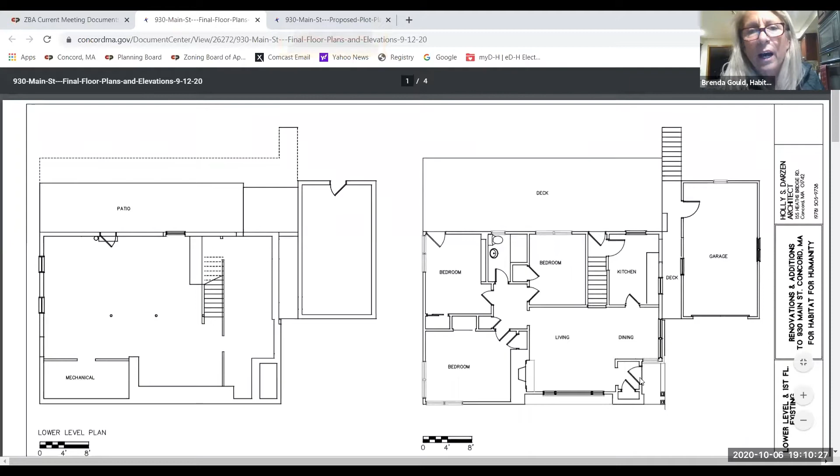As I mentioned, we want to leave the house as much intact as possible. Really the main floor is going to stay pretty much the way it looks right now. The upper level will pretty much stay in that format with the kitchen to the right, the 3 bedrooms, and a big living area in the front. We are going to upgrade some of the exterior—siding, roofing, trim—so it won't look exactly alike, but it will still keep the essence of the original building.

The lower unit, we are proposing a walkout level of the existing building. It will be accessed by construction of a new entry and stairway. The garage structure will be extended a little bit more toward the street, but it will have the same roof line as the existing, and it will provide space for the front door and a small covered porch. So keeping the existing roof lines means that pretty much the appearance of the home will really not change, and that was something we wanted to do. It also provides some measure of privacy for the 2 families.

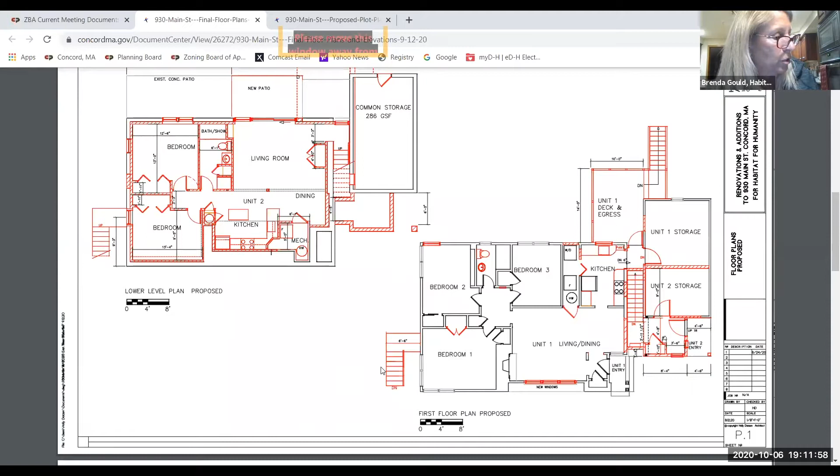The only other change is the stairway down to the lower unit. It will be where the current gap is between the house and the garage—that's where the stairway will be. The 2 homes will be separated by the fire-rated construction necessary, and each home will have a second means of egress. The upper unit will be through the new deck we're going to put on—there's a big deck there now, we're going to put a smaller deck, and stairs down to the backyard. The lower level will have the sliding glass door in the living room area, onto the patio, and then egress through the stairway down. Each of the bedrooms will have the windows necessary to meet emergency escape requirements.

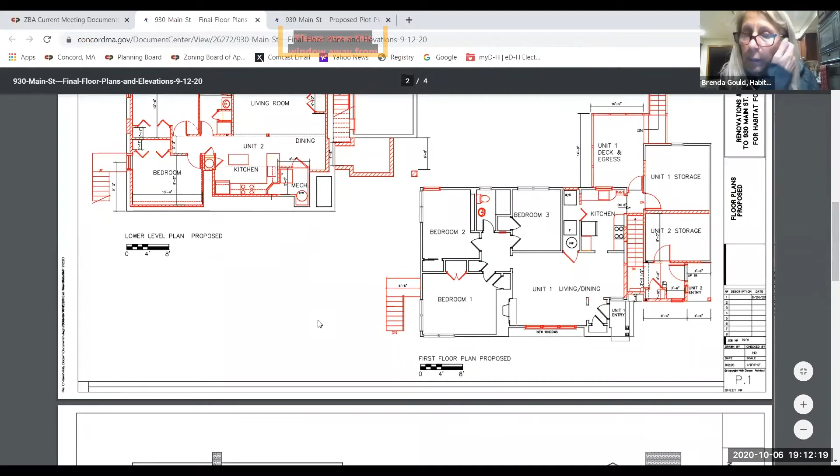So the major change is the garage, putting that into a storage unit. One thing that Habitat has learned is in order to be a good neighbor, you have to have a place to put things.

There's going to be bikes and there's going to be stuff, and we want to make sure that it's not out in the front yard or in the driveway. And so a storage unit, we feel, is very necessary. At a later date, should we look at the proposed site plan and see if a shed can be put in, that's a later date. But right now, the storage unit is kind of key.

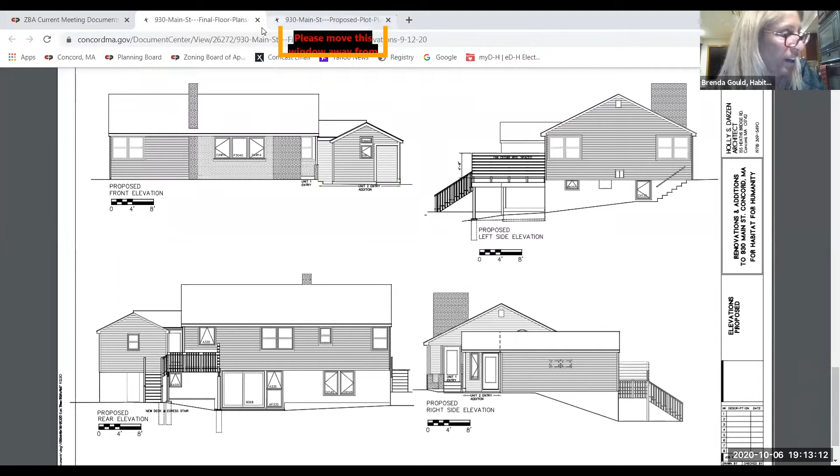I think in general that is the main bulk of what I'm asking. And Elizabeth, I thank you for putting together this letter. It covers everything and has given me an area to really make sure that we're abiding by the rules in Concord. We haven't built in Concord since 2007, and it's a little bit different from the towns I've been dealing with. Had Jeff not made me aware of your tree bylaws, I may have accidentally gone and cut down some trees, but we want to make sure we get off on the right foot and do this all correctly. So Elizabeth has laid out what I need to do, and we will do it.

So the issue, this is what we have. The main concern right now is that small piece of the garage that's over on the state land. I have Stan here should you have any questions. We really prefer not to remove that. It's costly and would really slow us down. But other than that, everything is pretty much staying the same.

It currently has a cesspool, and so we are working with one of the authorized drain layers from Concord, Bill Eckelsheimer, to put in sewer lines and water lines, singular. And we will do our very best not to disturb too much vegetation. We have our rules on that. That's kind of it in a nutshell.

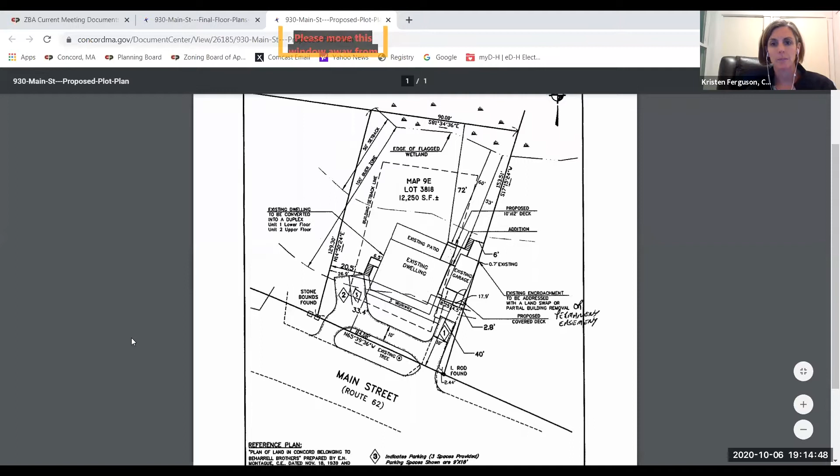I've got a quick question. So these will be condominiums, is that correct? Yes, we'll put in place a condo association. Okay, and you said it will be just single water, single sewer hookup, so those won't be separated?

If I read the water and sewer information correctly, originally we were going to make it separate. My preference would be to make it separate, but based on their guidelines, they're asking for a singular hookup. We have to figure out a way whether we can put two meters on one line or do some kind of deduct meter, because we don't want the families to have to worry about who's using what water. Right, that's why I asked the question. Yeah, we have done that before.

So Burton, what I can tell you is there's going to be two options, and they will easily be able to work through either option with the water and sewer division. It comes to either they would provide their floor plans and plumbing plans to show that there is complete separation between the two units, to be able to somehow have two water hookups. If not, there would be one water hookup, and then once on the property, they can be separately metered. Oh, okay, so it'll just be how they work through that with water and sewer division. Okay, great.

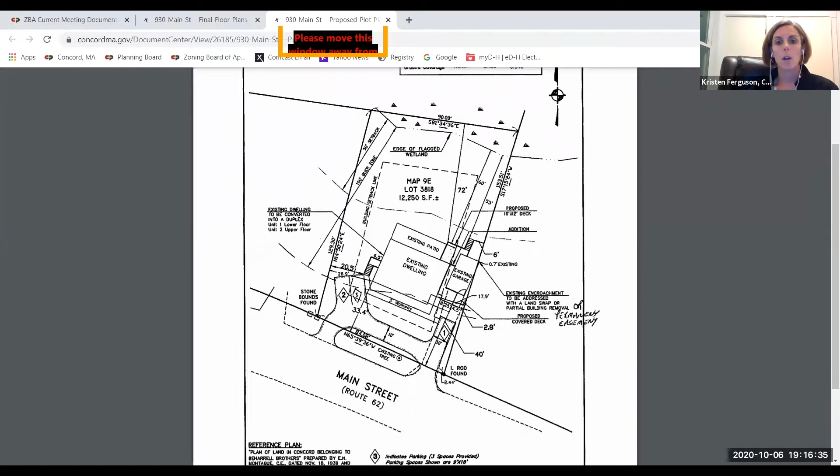That's my only question, Kristen. Question about Ms. Gould mentioning the corner of the garage on state property there. Is that anything that we need to take into account for the parts that we're evaluating?

So that's why we were happy to have Stan from the state available for this meeting. He can go through and talk about the state being willing to provide a permanent easement for that. Stan, if you want to go ahead and explain that, that would be great.

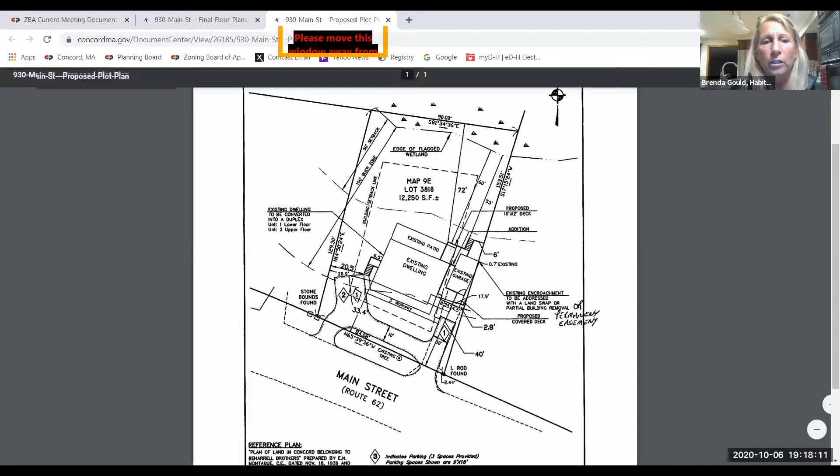What was your timeline again for the project? John's or mine? What are you total anticipating for the project start and finish date?

I was naively thinking we would be able to start before the end of the year. Originally I was hoping we could start in September, which is long past, and be done in a year. Normally, a year.

Because we build with volunteers, all volunteers, and I know you're sick of hearing about the COVID problem, but we have to be very careful with what we have on for volunteers. We're only accepting about 8 people, if people even come out. John's done a really good job making sure safety measures are on site.

So right now we're building in Billerica, and due to the reduced number of volunteers, normally we have 2 houses going at once, but we'll probably hold off and start this one sometime in preferably January or February, then be done before the end of the year.

Wow, that's a challenge. Yeah, well we're hoping the house is in pretty good shape, so we don't have to start from scratch. But as many of you know, once you start opening up walls, sometimes rehabs are harder than starting from the bottom up. So we're pretty excited about this.

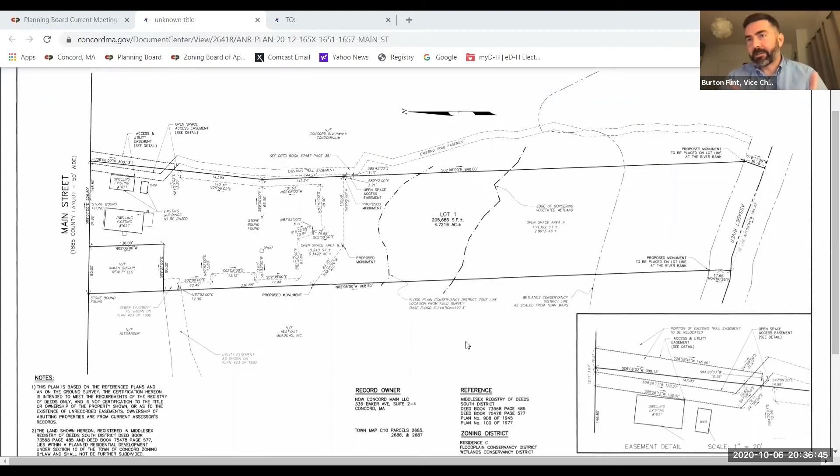Elizabeth, I will abstain from this just because I'm a direct abutter. It seems silly to do it on an ANR, but would you agree that makes sense? It's fine. All right, thanks. Are there any questions or discussion about the ANR, what Elizabeth's showing?

Okay, then I would entertain a motion. So everybody have their memo in front of them. If not, I'll do it. I can do it.

There it is, the planning board should move to endorse the plan. I move that the planning board endorse the plan for Now Concord Main LLC dated September 23rd, 2020 as approval not required, because the plan is not a subdivision, because the combined lot has at least 80 feet of frontage on an adequate public way, and authorize the chair, clerk, or town planner to endorse the plan.

Is there a second? Second. Is that Nathan? Yes. Thank you. Ms. Miller? Yes. Ms. Orvidal? Yes. Mr. Saya? Yes. Ms. McEnany? Yes. Ms. Ferguson, yes. And Mr. Flint is abstaining.

Yep, okay. And then do we have one more A&R? Okay, yes. So give me 2 seconds, and give me one more second. So I'm going to promote the...

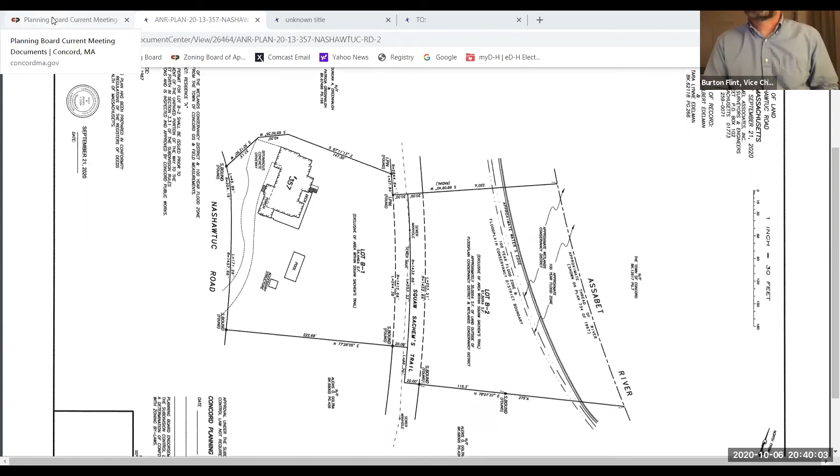And if the board needs to, I can bring up the town's web GIS and show you exactly where that is, if that's helpful. It'll just take me a minute. Would that be helpful? Yes, yes, it would be helpful. Thank you. Okay.

Okay, so this is Main Street down here. Then it goes off to Elm Street over here. This is Nashawtuc Road coming off of Main Street, Nashawtuc Road wrapping all the way around. This is the lot under discussion tonight. Off of Nashawtuc Road is Squaw Sachem Trail.

Squaw Sachem Trail is an old right-of-way from this initial subdivision. It is a private way, it is not public. It has been improved all the way down to 80 Squaw Sachem Trail.

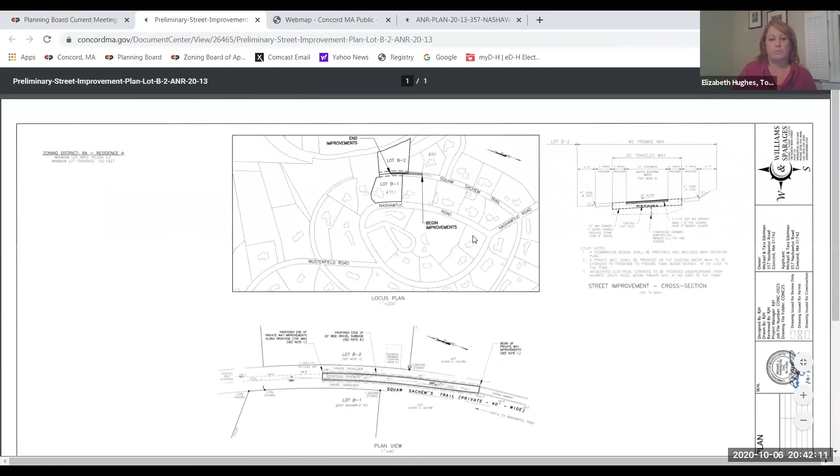So what the applicant is proposing to do, they have provided an A&R plan as well as a street improvement plan. And the street improvement plan shows improvement of Squaw Sachem Trail, from the current end at 80 Squaw Sachem, and how the road would be improved to an adequate pavement, grade, drainage for 150 feet, which is the required frontage in the Residence A zone district.

So that they can provide the sufficient frontage and area to create this new A&R lot divided off from this lot, there is a condition, a note on the plan. It states that no building permit for lot B2 shall be issued prior to the improvement of the unpaved portion of the way, to the standards set forth in section 3.3.1 of the subdivision rules and regs, and is inspected and approved by the Concord Public Works.

So what the applicant is asking for is for the board to conditionally endorse this A&R plan, that this lot will have sufficient frontage on an adequate public way, conditioned upon that street improvement plan and those improvements being constructed prior to a building permit being issued.

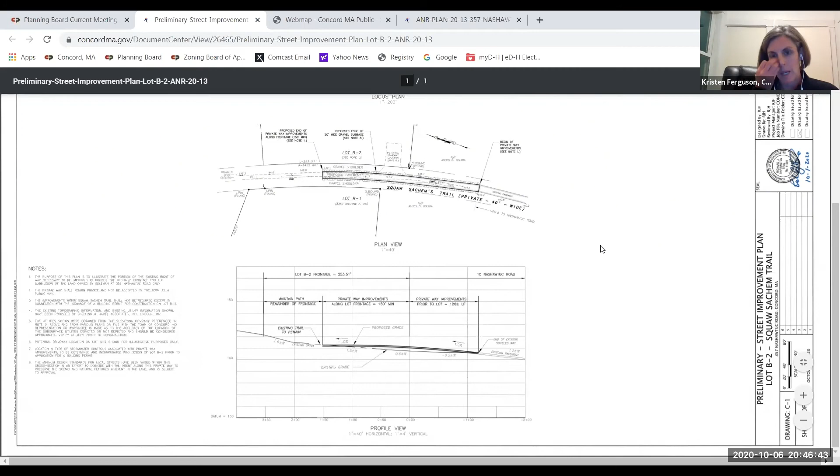And Linda, my apologies, approval not required, and I know you are getting yourself up to speed. When these come before the board, there are just a couple of factors we are able to take into account after we've asked any questions to make sure we understand. I believe they are: that if it's not a subdivision, it has the proper frontage on the way, and it has an adequate square footage. And if it has those two things, the approval is not required, and I think we approve it.

So what I can explain further, for Linda's benefit, since she has not gotten her packet of stuff that you all get when you become a planning board member, which includes your zoning bylaw and subdivision regs. We have other handouts regarding subdivision control law and approval not required plans. Under the subdivision control law, the state specifically states that the division of a tract of land into 2 or more lots, including re-subdivision, shall not be deemed to constitute a subdivision if at the time it is made, every lot within the tract has frontage on a public way, a way which the town clerk certifies as maintained and used as a public way, a way shown on a plan previously approved and endorsed in accordance with subdivision control law, or a way in existence as of February 28th, 1938, meeting the standards of the board as set forth in section 3.3.

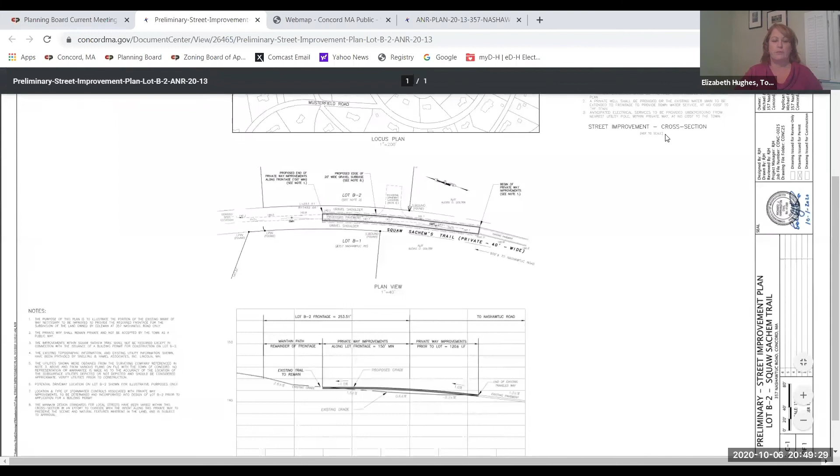Is the traveled way constructed at least 18 feet wide with at least 8 inches of depth gravel, and were adequate provisions made for drainage? That's what this plan shows. It shows the cross section, the depth of gravel, and the width of the pavement. And if the road could ever service more than 5 dwellings, is it bituminous surface or have provisions been made for surfacing without cost to the town? This is showing that it would be a paved roadway.

Have provisions been made for public utilities without cost to the town? There are public utilities running through this section, and I believe there's an actual town sewer main that runs through here. And yes, so 3.3.1.

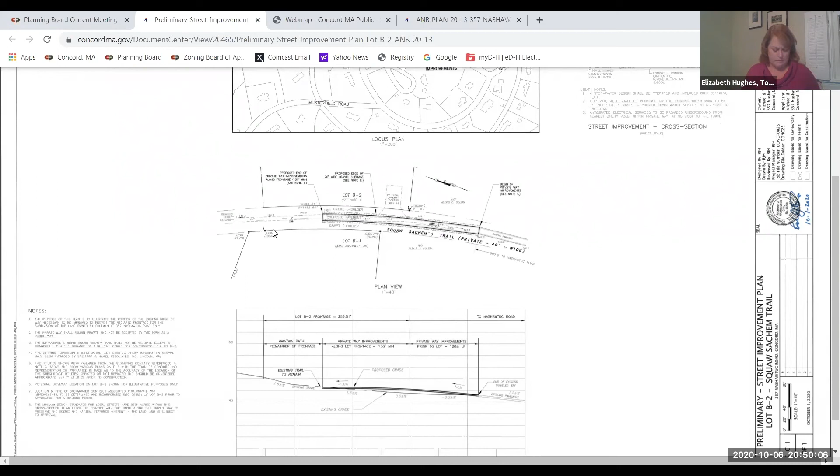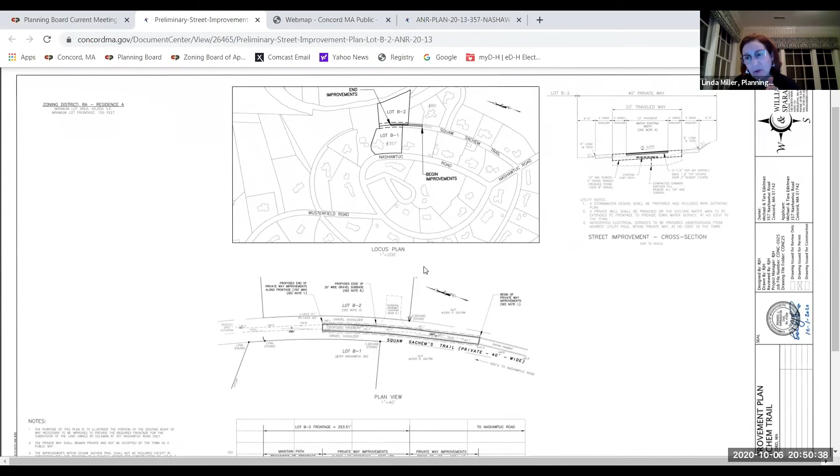I have some questions, and maybe they're irrelevant or maybe they're not. Squaw Sachem up until this point is becoming parallel to the Reformatory Trail off of the Assabet River, and when it gets to this point, it's getting quite a bit closer to the river. So in terms of that distance to the river, there are a couple questions. Would there be any adverse effects of this road being placed closer to the Assabet?

And then the question is, in terms of the current use of the Reformatory Trail, you can walk all the way from Squaw Sachem to the Concord Land Conservation Trust areas on the other side. And would this use of the land interfere with the river confluence trails that are over there? Or are those things irrelevant?

Well, they're not irrelevant, but they're not relevant to the discussion of an approval not required plan. So an approval not required plan is only looking at whether there's adequate frontage for the creation of that new lot.

Can we assume, Elizabeth, looking at that plot, or at this web map you've got up, that the reformatory rail bed has been extinguished by several lots in a row, in terms of a right of way, at what is now going to be this lot B2? Is that what I'm seeing here? I see that, correct. Yeah. Okay.

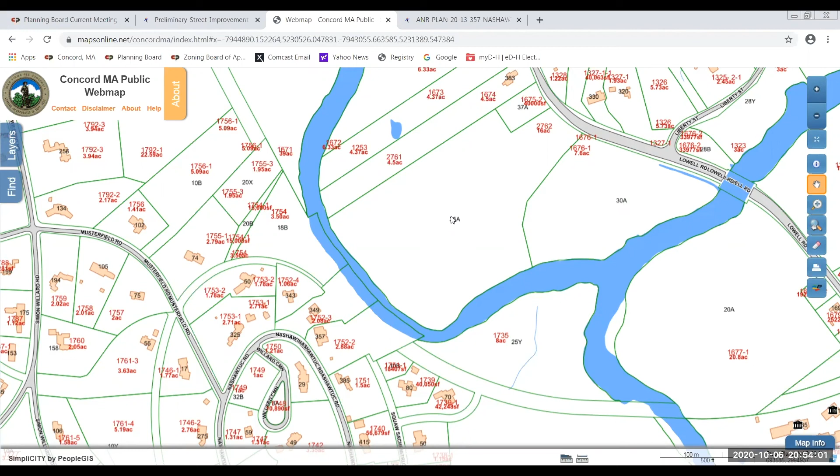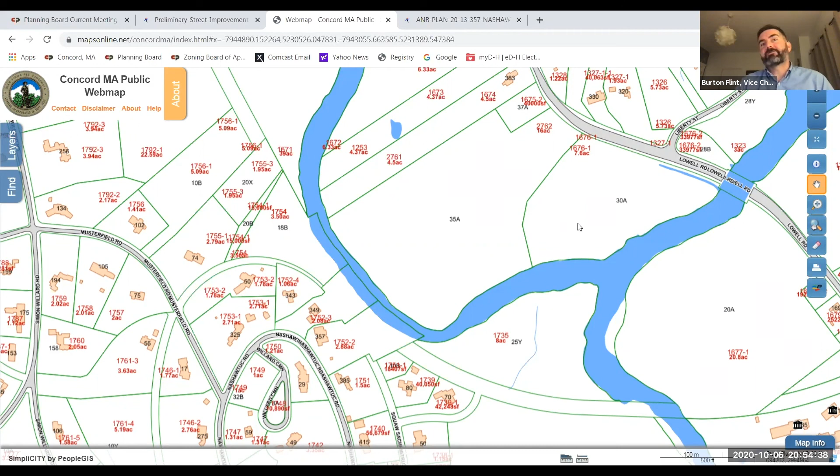Thanks. So, just to confirm, Elizabeth, on this map Squaw Sachem does not continue through those lots, but that is a recorded private way, right? Yeah, correct. Well, I mean, it's used actively now, people walk through those trails. And people would be trespassing, technically. Yeah, I mean, it's a pretty well-established trail, and I've walked along it, but I did not realize that the railroad right-of-way doesn't exist there.

It's interesting. So when we make a motion for this, are we saying, as with the condition of the road being there? Because we can't say it has adequate frontage on the road yet, right? How do we state this?

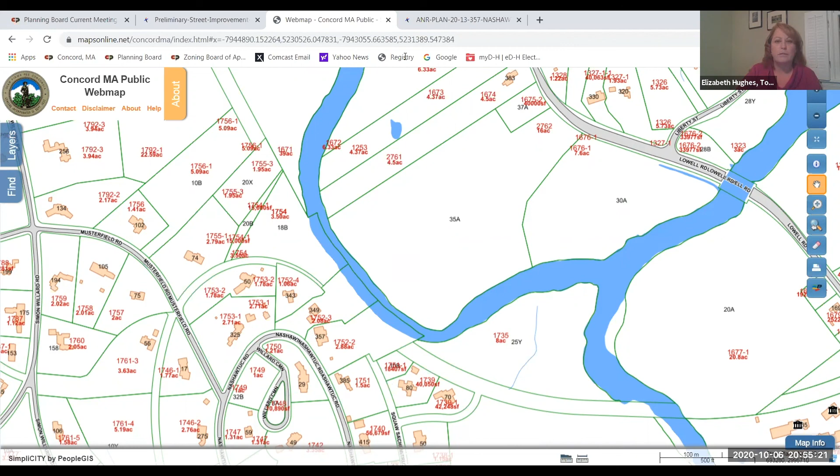No, so the motion would be to endorse the plan as approval not required, with the stated condition that no building permit shall be issued until the roadway is constructed to the standards of, what's on, yeah, constructed to the standards of 3.3.1 of the subdivision rules and regs, and inspected and approved by Concord Public Works.

Nathan? I have a question, maybe they can't answer it. I noticed that the main property is currently for sale. Is this planned work going to be done as part of the sale, before the sale, or just being offered up to a potential buyer as a way to sell off some of the land? I'm trying to understand how that kind of fits in the timing of this. But again, that may not be for us to know, I guess.

Any other questions? This is probably the first time we've seen something like this. I believe after talking with Marcia, this has happened once or twice before. Yes, I would agree, I have seen it happen.

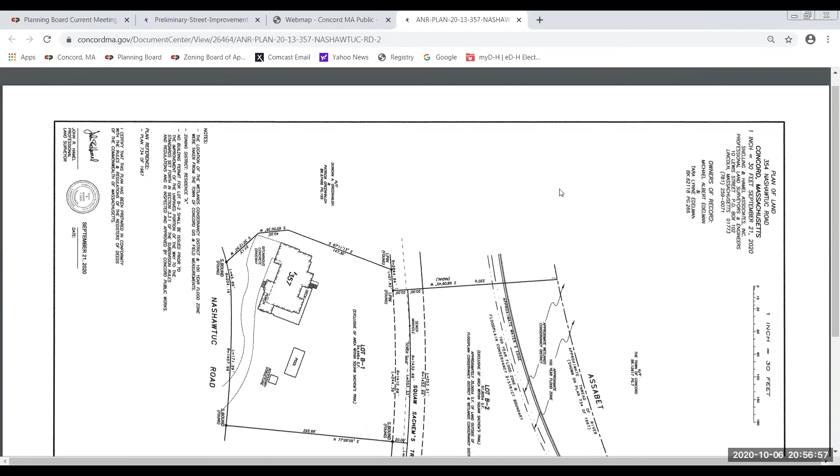And was the road constructed or continued? In the case that I'm aware of, no, it was done for valuation purposes and then sold to the land trust. Oh, interesting.

All right, would anyone like to make a motion? I have just one additional question. Prior to construction of a road, would natural resources be required to review this given the proximity to the Assabet? If those improvements are within 200 feet of the river, yes, they would need to file a notice of intent. Okay, so because it looks to me as if it is within 200 feet. Then they would be required to file a notice of intent. Okay.

Kristen, I'm just looking for the verbiage here - you're going to move to endorse the A&R with the stated noted condition. I don't think we have this one written down, or not that I noted. No, this was filed yesterday.

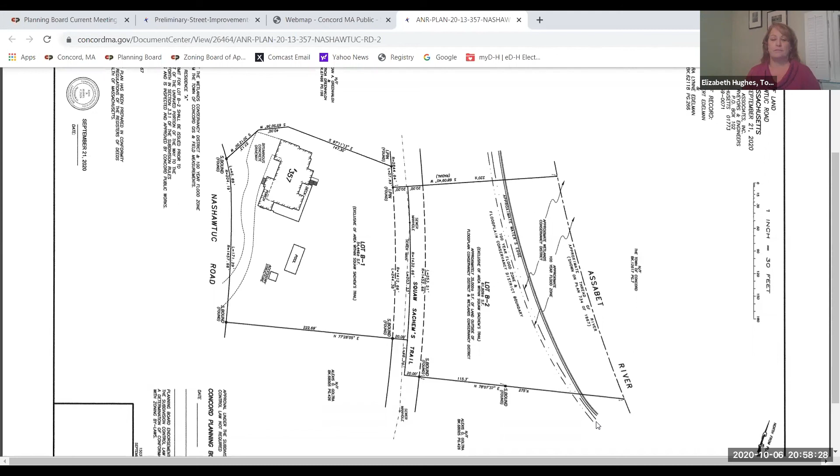Okay, if you're okay with me winging it, I move that the planning board endorse as approval not required the plan, number 20-13 for 357 Nashawtuc Road, parcel 1752-2. Is that sufficient? Yes, thank you. I'll second that.

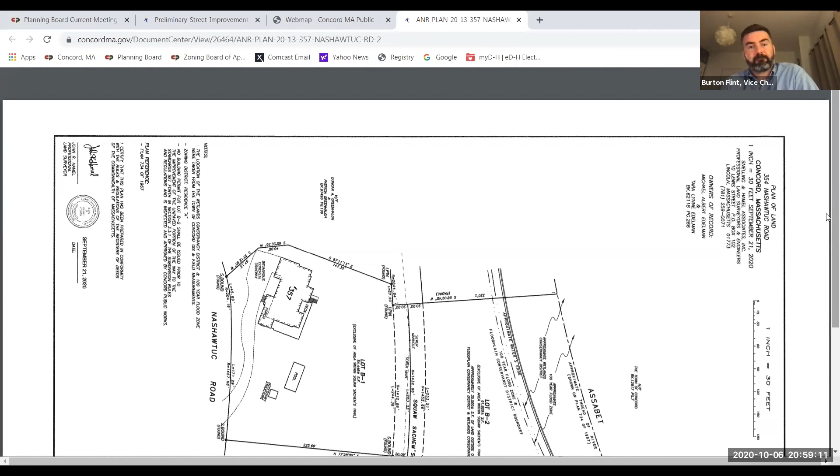Did we get the stated noted conditions? Oh yeah, endorsed with the plan containing the conditions pertaining to improvement of the road prior to the issuance of any building permit. Still second it. Thank you.

Discussion? All right, Mr. Saya? Yes. Ms. Miller? I'm going to abstain. Okay. Ms. Orvidal? Yes. Ms. McEnany? Yes. Mr. Flint? Yes. Mr. Bosdet? Yes. And this is Kristen Ferguson, yes.

All right, thank you Mr. Dane, for being on in case we had questions. I hope - oh, thank you. Thank you, I appreciate your support.

And now we've got a set of minutes from September 22nd. That was fast, by the way. Is that Nancy? Yes, that is all Nancy. Thank you, Nancy, that was really fast. Did anyone have any comments or grammatical improvements to the minutes of September 22nd? Looked good to me. Thorough and accurate, yeah, I did not notice anything.

With no comments, I'll make a motion that we approve the minutes of September 22nd as drafted. Is there a second? Second. I'll let Haley have that second. Mr. Saya? Yes. Mr. Bosdet? Yes. Ms. McEnany? Yes. Mr. Flint? Yes. Ms. Orvidal? Yes. Ms. Miller? Yes. And this is Kristen Ferguson, yes.